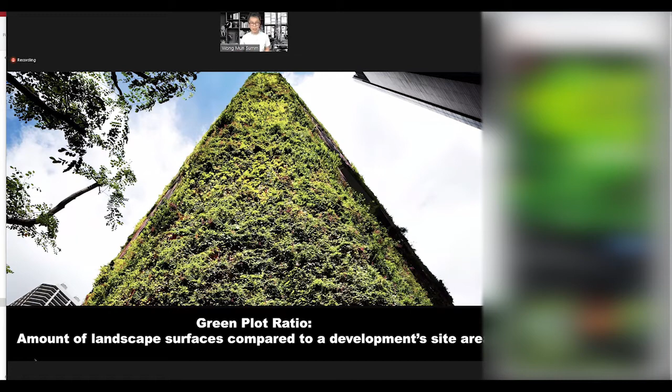So just to explain a few of these indexes, the green plot ratio is fairly simple. It's about the amount of landscape surfaces compared to the development site area. Community plot ratio is the community spaces that we allocate within development over the site area.

Civic generosity is a more difficult one. It's about how the development encourages and facilitates public life in the city.

Ecosystem contribution index is the degree to which a development supplements the city's ecosystem. And the last one, self-sufficiency index, is whether a development can provide its own energy, food, and water.

This one is very important in today's climate, where we're going through a pandemic, where our supply chains are limited and affected, and we can't travel. The topic of whether cities or countries should be self-sufficient has got heads turning, and people are discussing it.

Just to recap some of the projects I explained earlier and how they rate with our own ratings. We did these ratings to push ourselves so that the next project must be at least better than the last. We don't like to stay put, but we like to constantly push the agenda and do better.

This was the basis for us to measure ourselves. So for SOTA, as I mentioned earlier, the community plot ratio is high because this was the 'cheese building' — we created a lot of volume, a lot of anti-mass or negative mass, basically a lot of voids. These voids were actually social condensers, learning and teaching spaces for the school, and you can see the percentage is 220%, 2.2 times over the site area.

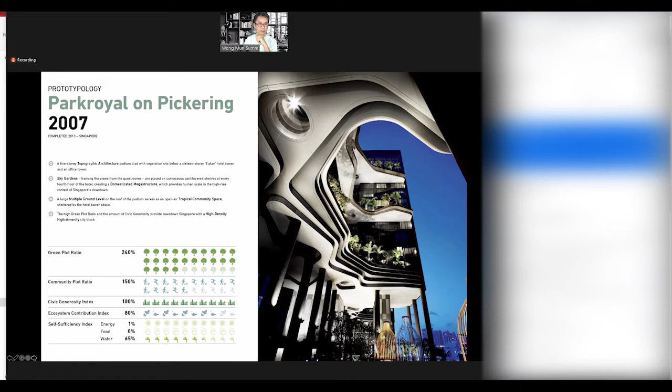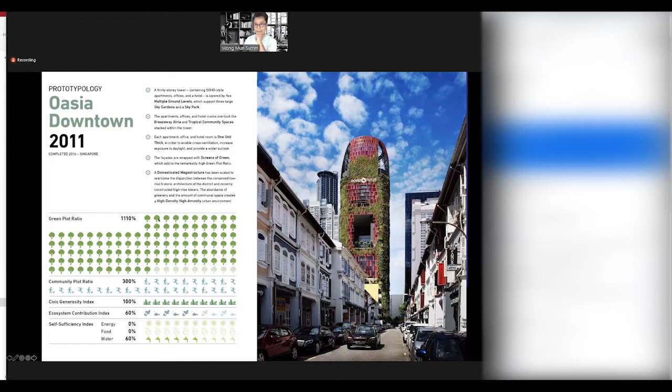And Kampong Admiralty integrates quite a few systems, so the scores are fairly general in nature.

I will now take you through a series of buildings to talk about typology, and how we can scale up some of this typology to precinct scale and then to larger master plans and city scale. I think this is important because city planners crunch a lot of numbers, but they tend to lack the three-dimensional quality of what buildings and architecture can contribute to the bigger picture, to the city scale.

This is where, in one of the chapters of our book called Prototypology, we see every building of ours as a new prototype, and when scaled up, it has a certain impact on the city.

This is the Singapore Pavilion at the World Expo. It was meant to open last year, but due to the pandemic it will open in October this year, in 1.5 months' time. It's almost finished — quite exciting. The greening is already in place, and it does look quite like this rendering we have.

But what was the starting point? It was really about thinking about Dubai and Singapore — we are both man-made ecosystems, but we do learn from nature, a sort of biomimicry, how we actually learn from nature to create our own habitats, perhaps.

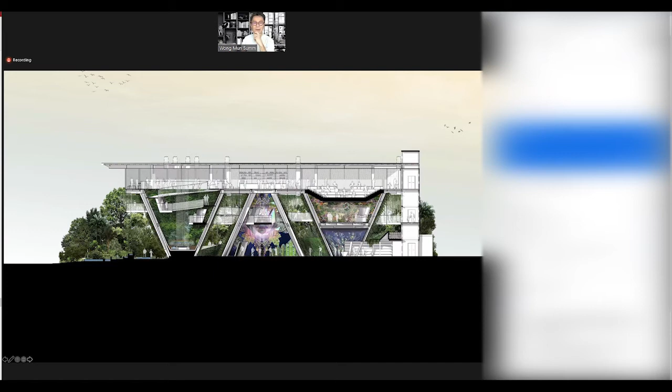So you'll be walking into a 3-dimensional garden. You'll wander around into 3 cones, and these 3 cones are a very innovative way in which we wanted to think about integrated landscaping.

We have inclined and naturally sloping vertical green. We have green on the ground, but we also now have green on the ceiling. We are defying gravity by creating a 3-dimensional, enclosed ecosystem of landscaping.

This is done through having the entire roof area in solar panels, indirectly creating the food and energy for the plants through sunlight, grow lights, and sun pipes.

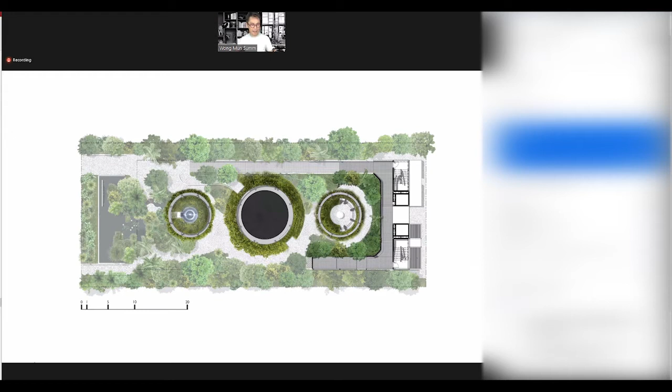So this experience of this small little oasis starts when you meander around the three cones, then takes you onto a canopy walk that brings you around the cones into 3 different exhibits: a rainforest exhibit, a city cone where we highlight some of the amazing things we do in Singapore, and a flower cone where we highlight the beauty of Singapore orchids.

So this is the canopy walk. You'll be able to see landscaping engulfing you from the sides, from the bottom, from the top.

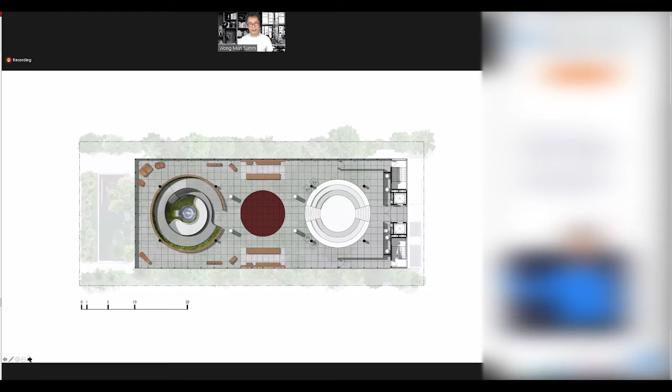Then through all this meandering through the 3 cones and the canopy of landscaping, you arrive at this marketplace, which is almost the entire footprint of the buildable area as usable space. So here you wind up.

But what is actually impactful about this pavilion - because of the full coverage of the footprint of the building as PV panels - we are able to create a zero energy, zero water, and zero waste pavilion. Water is desalinated using the solar panels, energy from the solar panels, and complete recycling of the waste.

Any food waste is going to be composted. Any other waste will be recycled, including the final disassembly of this pavilion.

But what is noteworthy is that we wanted to see the ecosystem services of this pavilion, if scaled up, and the impact it would make in semi-desert and desert areas. So we are comparing against Dubai's natural sandy vegetation, then a typical local bungalow about the same size as this pavilion, the Singapore pavilion, and then scaling up to district level.

So you can see the ecosystem services that the pavilion provides - it helps to purify air. If you see these indexes here, Dubai's natural sandy vegetation is always the basis at 100%.

Next to it is the local bungalow and how it performs, then our Singapore pavilion and how it performs, and finally when it's scaled up into a district like the Palm Jumeirah, full of these local bungalows, what impact it will have.

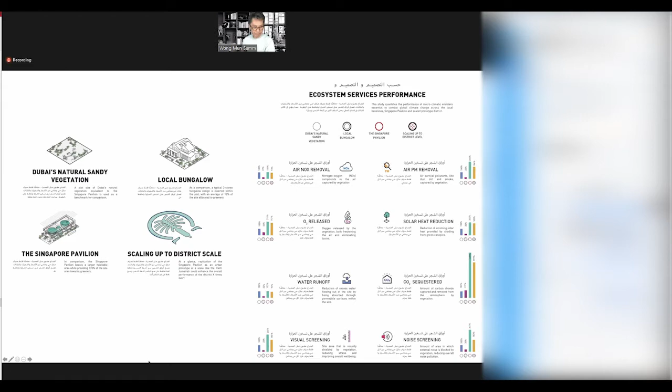So we wanted to also explain, if we actually move this pavilion to a further extent, what it can possibly do. There's a possibility that it will actually reverse desertification. There is science in it that with reintroducing vegetation, it's possible to increase rainfall by 30%. This is a bit of a summary of the good things at the regenerative scale.

That any cities, any countries should consider. I will not run through all of them, but some of the things I think will be meaningful to discuss later is densification by three-dimensional planning. Half Earth is something I'm quite interested in, which we started calling some of our cities and master plans 50-50 cities, in which we think it's important to reserve and allocate 50%

of the land to be rewilded, to be for nature, so that the planet can regenerate. Some other things that could be considered are integrated landscaping, moving towards plant and lab-based food, permaculture landscaping. So these are some of the good practices I think the world can go into.

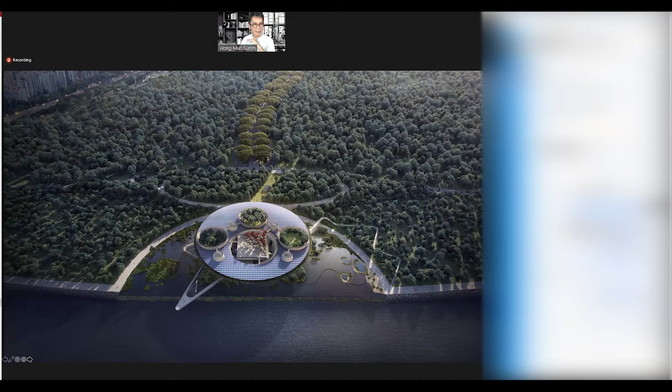The roof is entirely dedicated to solar panels. And if we think about what is the best and most efficient form of clean energy for the tropics and desert areas, it's certainly solar panels. For the tropics, it needs to be on the roof because it's the most effective way. So that actually informs your form, and it informs how you would do three-dimensional planning. The top layer should always be reserved for producing clean energy.

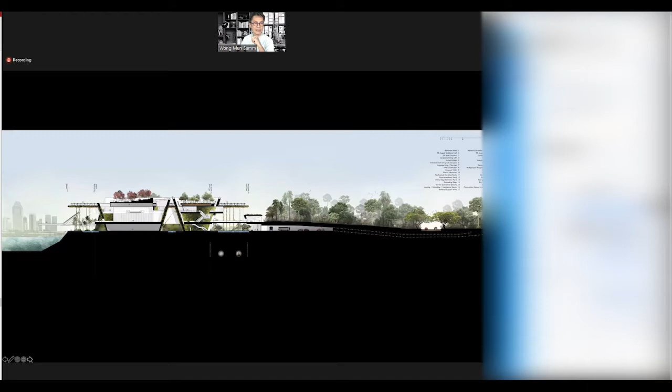So as a section, you can see it's quite similar. There are a lot of gallery spaces and community use spaces within this facility. And of course, the amount of greenery here exceeds the Singapore Pavilion. The amount of ecosystem services it would provide also does very well.

Both on the inside and outside, we also have landscaping, and the landscaping starts to frame views. Even the roof can have event spaces that really take in the beauty of the city. And the whole memorial was a little symbol of Singapore as a little red dot.

This is another scaling up of our typology. I mentioned our cheese building, SOTA. This is the scale-up version, scaled up to almost 2.5 times the floor area. But in terms of capacity for students, SOTA was really a building designed for 1,200 students.

But in this BRAC University in Dhaka, it's actually scaled up to house 12,000 students, over 2.5 times in terms of floor area. So in terms of scale and per square meter for different cities, it varies. Singapore is fairly generous, but in a highly populated city like Dhaka, space standards are not as generous. Still, in terms of the ratios, we've been able to do very well.

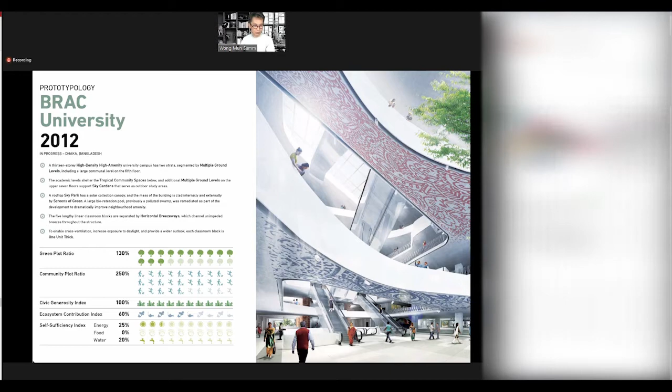This is the breakdown of the systems we were really looking at. We were looking at how we can create effective cross ventilation, creating horizontal breezeways, creating a lot of social spaces, informal learning and garden spaces for the university, creating a large public space on the ground floor dedicated to the community, open for the community to use, and to top it up, a solar canopy to provide the energy needs for the university.

We started off designing for a lesser quantum of students, only 8,000 to 10,000. We were able to achieve zero energy status for the building, but because they kept pushing the capacity of the university, they finally raised it to 12,000, with a target of 15,000 students. With the amount of facilities added, we were not able to achieve zero energy.

So we almost achieved up to about 75% of the energy used through the solar canopy, but it's a combination of passive strategy and innovative mechanical systems being adopted in the building.

Most times of the year, particularly in the winter and in the cooler parts of spring and autumn, you don't need any form of cooling. We can actually use an effective horizontal breezeway to cause effective ventilation to the classrooms. But during the summer period, we came up together with Transsolar with a hybrid system where cool air is pumped in with elevated wind speed in the classroom, using only 40% of the energy compared to air conditioning.

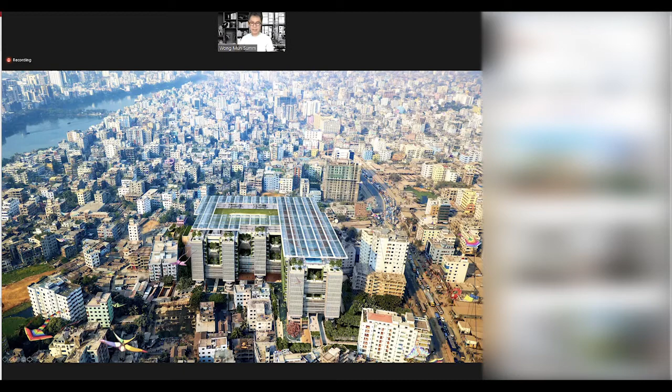What is also fundamental in the approach here is reducing the amount of spaces to be air conditioned. So all the social spaces and circulation spaces are not air conditioned. On the ground floor, other than the multipurpose hall and the auditorium, most of the spaces are not air conditioned. So just to look at the plan, this is a site plan.

The entire roof is dedicated to recreation. You have a running track, a swimming pool, and even a cricket field. But what is actually important about this design is our three-dimensional planning, the layering of different uses, and the club sandwich approach that we've taken.

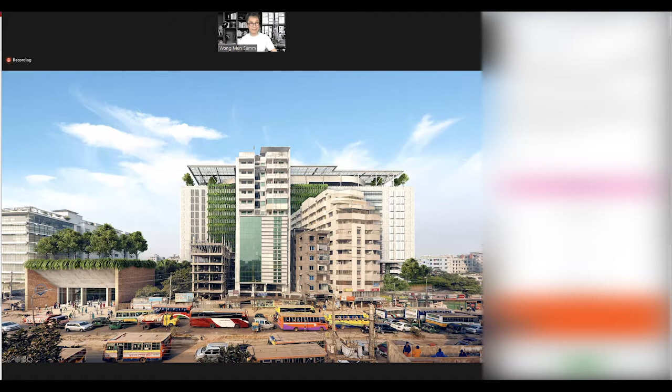This is what Dhaka is like. It's pretty chaotic, bustling, and very vibrant, and we wanted to create an oasis in this very vibrant and busy destination, turning the ground floor into a community park for the people.

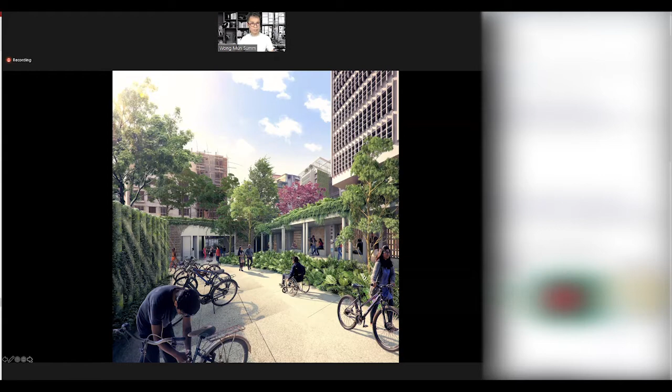And at the same time, as in SOTA, there are escalators and staircases that bring people to the upper levels, which become secure and private academic spaces for the university. These are some of the courtyard entry spaces that bring people into the campus ground. And as you arrive onto the ground level, it's an oasis of calm.

We are using a large water body, and this water body serves the function of cleansing the rainwater, and is also implemented as a grey water system for the development. And you can see from below, the solar canopy covers almost the full extent of the building footprint.

So this is the community park. We talked to the university, and we do want to encourage them to open it up and engage the community, to allow people to be able to use this space.

In terms of a section, you can see on top the long section across one of the breezeways, showing how the escalators bring people to important nodes like the library, the canteen, and the lecture theaters. In between them we also have staircases, bringing people all the way to the top where we have the swimming pool and recreational areas.

Below, you can see the cross section, with the breezeways cut perpendicularly. It is actually a true space between buildings. We created pockets in the roof to bring natural light in, so these long covered breezeways are not actually dark - they are all naturally lit. On the ground floor, you can see it has very little footprint, making it a very porous ground plane to encourage the community to use this park.

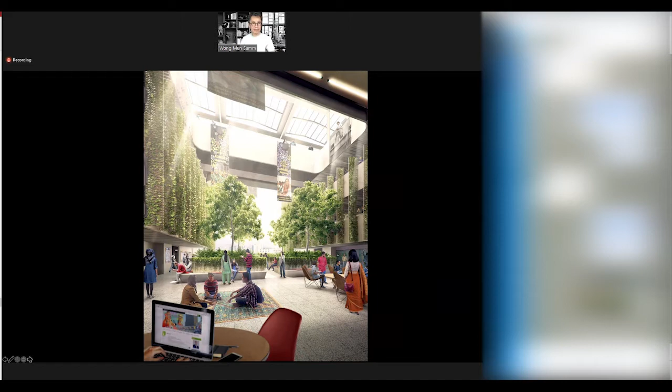These are some of the social spaces in the upper stratum, the private and secured academic areas for the students. The escalators bring people up - because of the number of students here, we needed to depend on escalators rather than lifts. As I mentioned in my first lecture, lifts are very antisocial spaces. Horizontal movement via escalators is something we think will engender a better community spirit within the development and the campus.

And the upper stratum is really a bright and airy, breezy, new kind of environment for an inner city, very dense city, yet at the same time creating the right quality of spaces, high amenity for the university.

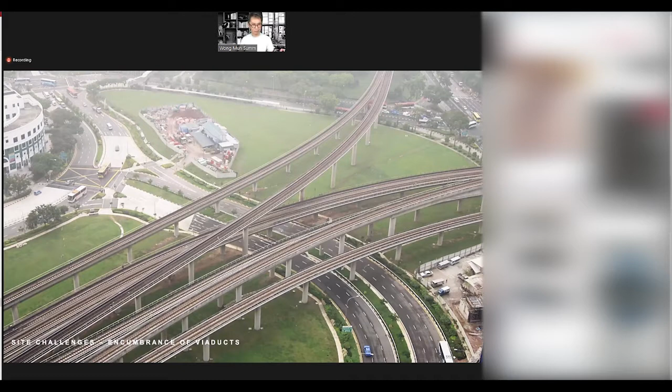So this is the site. You can see all these MRT lines crisscrossing each other, and the land is fairly underutilized because this was only thought of as a single-use space. But in high-density, land-limited Singapore, we need to think of multiple uses for any single piece of land. What it's really being used for is our foreign workers using it for their downtime.

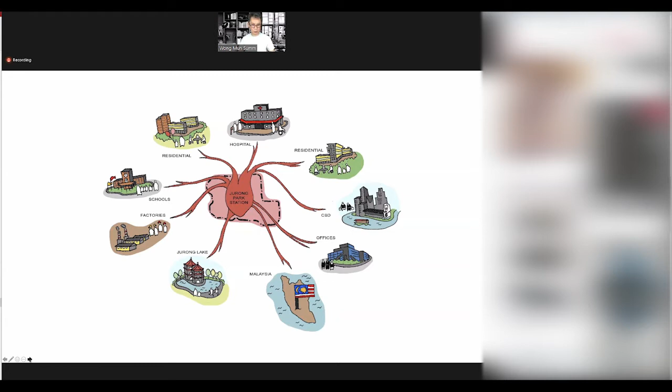That gave us a clue how we should turn this space into a useful park for the community. So this is what we call the Jurong Park Station. Jurong is where it is, station is for transportation, and park is because we wanted to introduce a park into this typology. It has important uses all around it, from hospitals to public social housing to offices, a business park connecting to Malaysia, to the second CBD of Singapore, factories, schools, and also Jurong Lake.

This is the site plan where you can still see all the MRT lines coming out from the train station, going in different directions, but underneath all of this is now a community park. On the bottom right is also the connection through a new form of medium mobility connecting the high-speed rail to this facility.

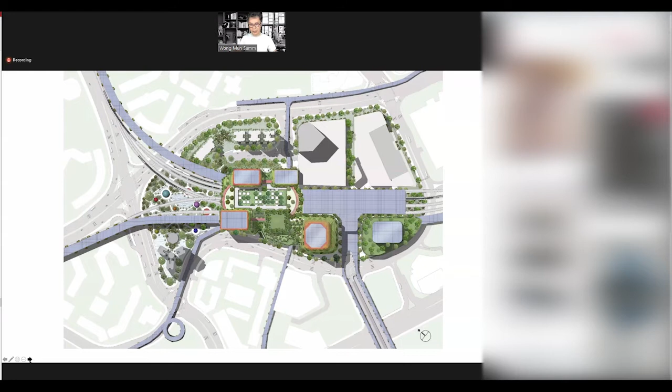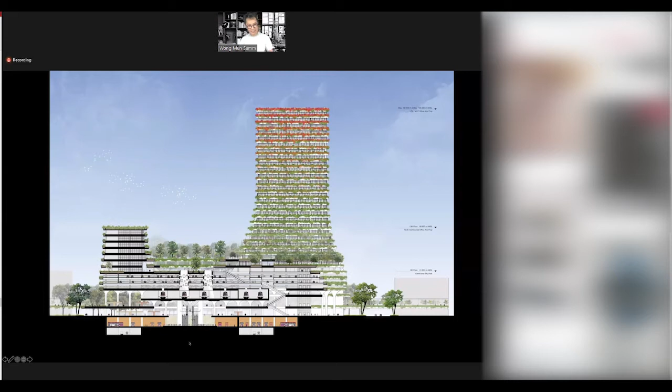This is a short section. You can see how the existing train lines are, and how we build on top of it while still creating enough daylight to illuminate the bus waiting areas, the train concourse, and the bus interchange.

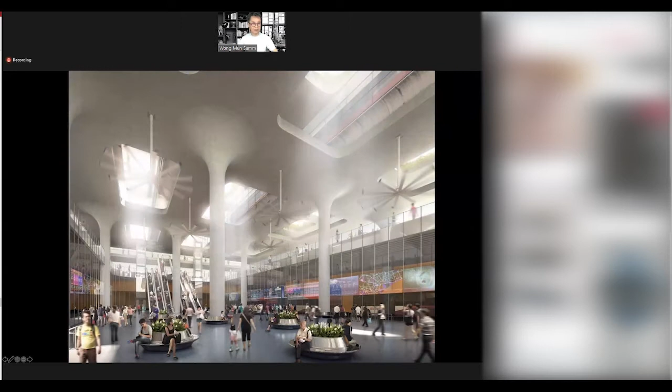This is a rendering of the bus interchange in the basement. You can see the railway tracks above, the MRTs running above, and yet still getting natural light to the basement. Directly outside of this is the bus interchange.

So overall you can see the railway tracks running around, but underneath is now turned into a community park for Jurong.

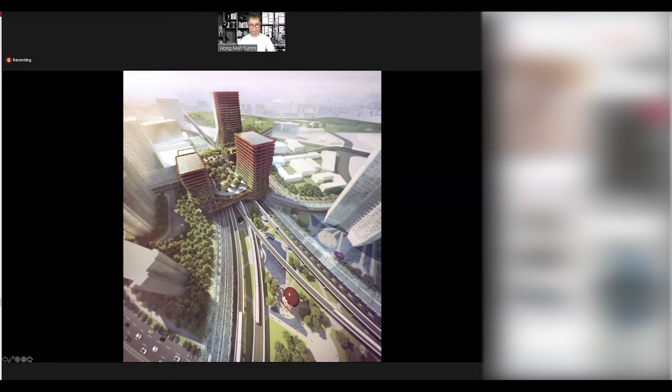What is important for us is how this is really a true transport hub, how this building can send out feelers to connect to all the precincts and to all the various major population nodes adjacent to this development, and also connecting Malaysia and also connecting to our central business district area.

I'll show you how we did it. We realized that between Singapore's Vision's second CBD area and CBD1, we have what we call the railway corridor. All we need to do is actually connect to it.

At the same time, there's an elevated MRT line that runs all the way from Jurong to the CBD area, and then it actually joins up with the railway corridor and also another green spine within the city itself. So we wanted to make all this connection all the way to the south and also connecting to the Jurong neighborhood as well.

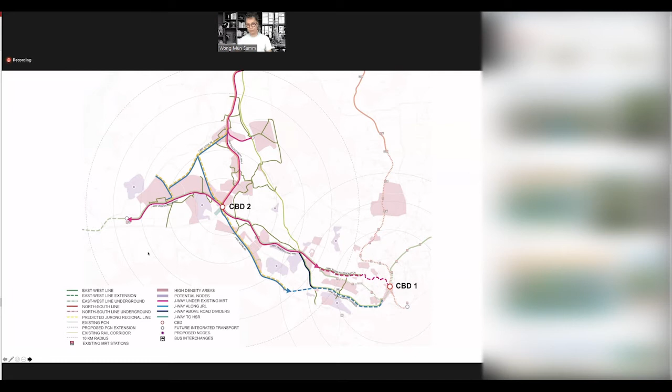So this is what we created: all these pillars that are actually for pedestrians and personal mobility devices, people using scooters, people using bicycles, and yet safe walkways for pedestrians, connecting people to the various neighborhoods.

What is really quite nice about Jurong at the moment is what they call the J-Walk, where it actually connects all the buildings together. This is connecting to that network and creating a bigger network for pedestrians.

But now we decided that we actually would bring in medium mobility, where bicycles and scooters can be accommodated, and designed viaducts for this mobility.

I think we catered too much for fast mobility and for cars, but we haven't done enough for pedestrians and for PMDs. I think this was one exercise where we thought maybe it's possible for us to consider building for it.

As you can see, the roof structure over this mobility devices and feelers are always covered with PV panels, increasing the surface area where we can actually have solar panels to create more clean energy for the development of the city.

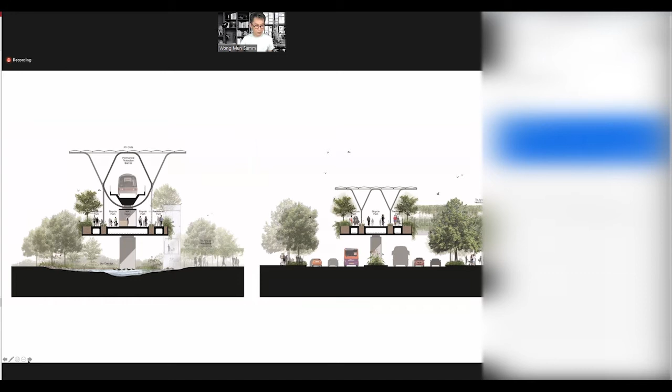There's also how it actually works together with the ground level, where the ground level is also turned into a park. And then with the new J-Way, and also with the fast train coming in, all this will start to connect the entire district and the entire second CBD of Singapore.

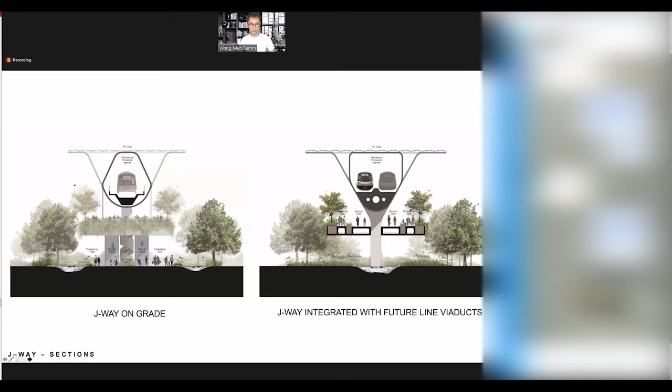So in terms of the plan, this was what we wanted to do. We wanted to create nodes that were sort of mobility kiosks, where you can have shared bicycles, you could have a bicycle repair kiosk. It will also be a little stop for cyclists.

It could also have storage facilities, delivery facilities, all incorporated into it. And yet at the same time, it is actually a mobility device that is separating vehicles from slow to medium mobility. One thing we were quite adamant about was being able to provide universal access.

So it's actually provided for by using lifts to bring people onto this mobility device. You can see how the undercroft space of the MRT now is turned into a very park-like quality, where it also does a lot of ecosystem services for the city.

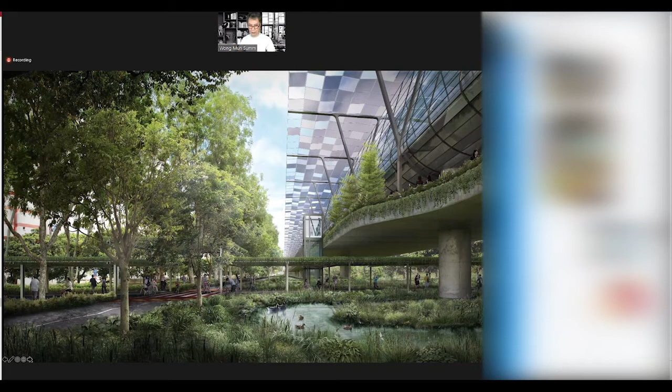So this was the connection to the high-speed rail. It was a little short monorail system, and yet at the same time plugging onto the bigger network of the pedestrian and cycling network.

And then when it comes to the existing neighborhood, a series of covered walkways, and reimagining how the landscape can turn into a more park-like ambience, and start to reduce the amount of car parking and roads we have in our existing urban fabric.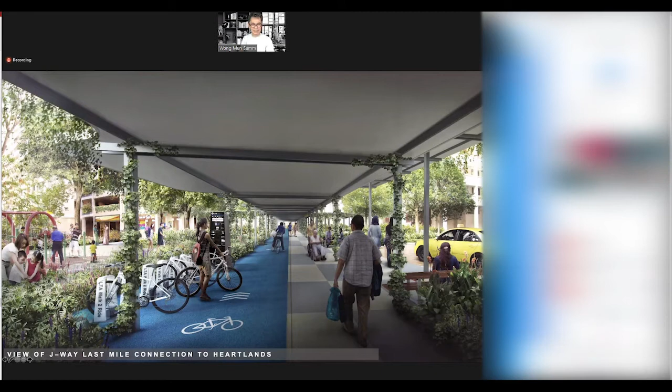Some of these ideas are actually implemented in Tampines, as part of an exercise we did with NUS and with Minister Heng Swee Keat. Some of these little things are implemented, but not on a big scale.

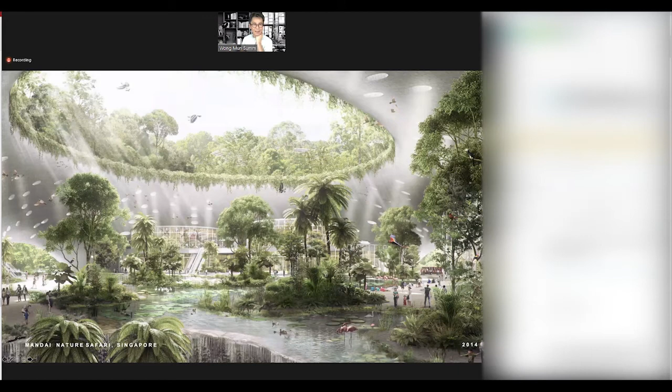Okay, another different kind of transport hub. Here you see is actually for Singapore's Mandai Resort, currently under construction. This was a proposal that we did, but we were not selected.

Again, as most of our projects are always overly ambitious, I think most clients and developers tend to get frightened. But nevertheless, it does inform us how we can push the design agendas. When we do win, we implement as much as possible, but we like to reach for the stars and do as much as we can, so when you start to cut it back, it still achieves a very high quality of our vision.

Here, it was about bringing a new form of mobility, fast mobility, MRTs, right into the doorstep of the Singapore Mandai Resort. Below is the MRT, the car parking, and the buses. But on the ground level, again, is a tranquil calm - it's a park, but it's actually your arrival.

It has many of the Mandai Resort amenities - the reception, some administration, some front of house for the hotels, and some front of house for the various parks within the Mandai Resort. But what is important is that above it is a shelter, and it is actually a land bridge that allows animals to move freely away from people.

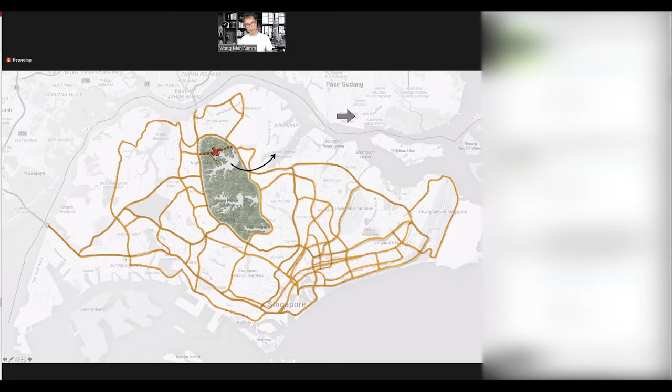Because one of the biggest problems about Mandai Road is roadkill, since there are fast-moving cars through it. So we suggested removing this road, downgrading it, and turning it into only a two-way gravel road, and allowing the canopy of trees to be planted close to one another, so that the canopy can start to bridge each other, so monkeys could swing from one tree to the other again.

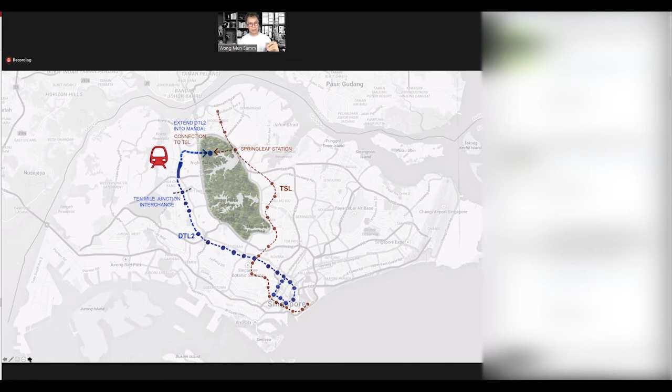And then having the MRT station coming in underground, under the Mandai Road, and then ending up in the entrance facility.

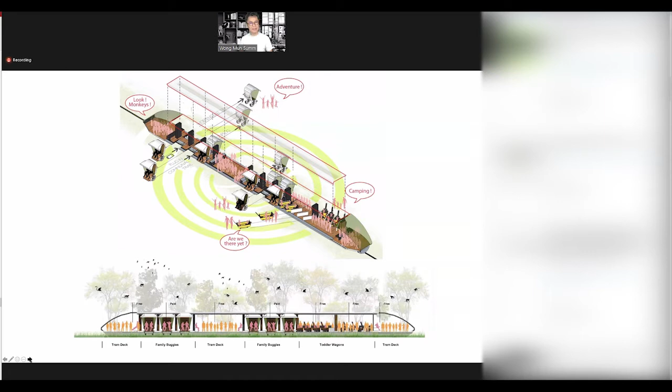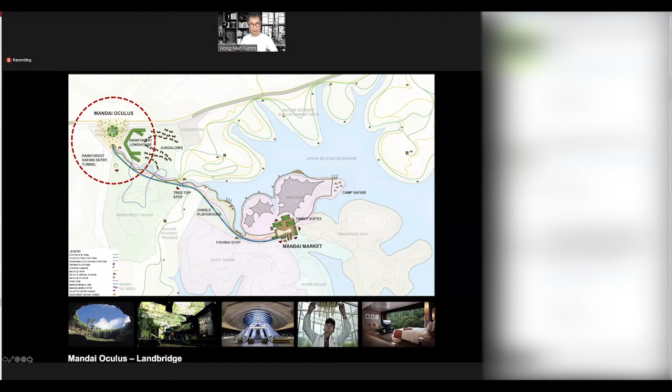So connecting the various parks within the Mandai Resort, we proposed the Mandai Mobile - a very friendly, family-friendly mobility device, good for wheelchairs, good for the elderly, good for groups. It would move within the area in a rather slow manner, giving priority to people and also animals. This is a larger extent of the Mandai Resort, with the various facilities.

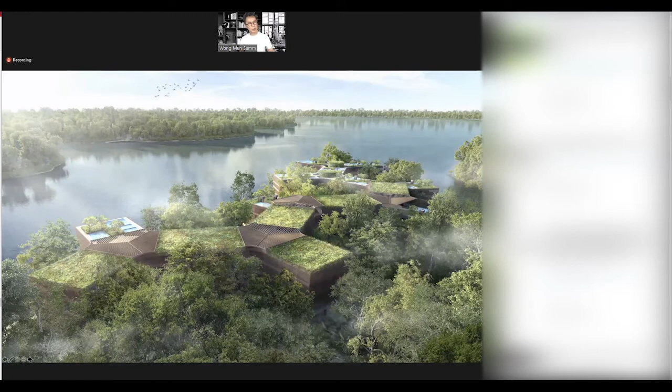And then we also did a scheme for the resort, for the hotel, a resort hotel within the development, and we call it the Hide because we wanted people to hide from the animals, to be able to be living in the environment, but not being able to intrude into the realm of the nature. This park is basically nature first, people second. So people are going to hide away from the animals and the insects.

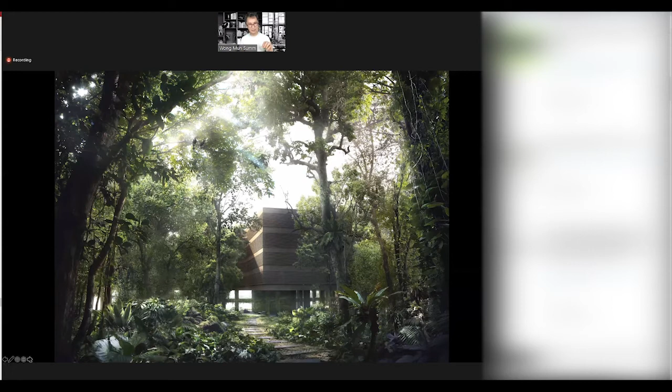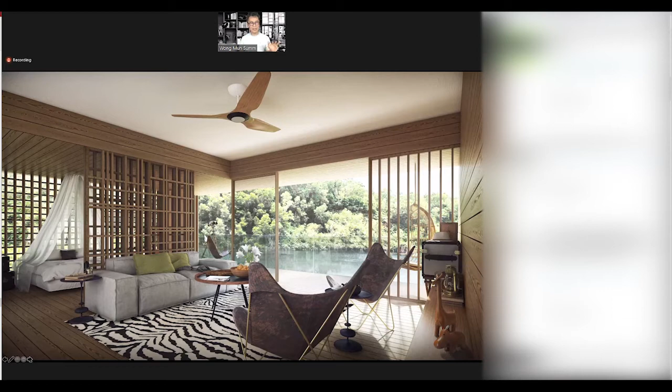Basically all the movement will be underground, and they only emerge into the building directly from an underground connection. Even the ground level is actually renatured as much as possible. It sits on pilotis, and even the facade of the building is such that it's preventing animals from seeing what's inside. You can actually from inside see out, but not disturb the environment. So this is from inside looking out - it has got screens, so hopefully animals will not be disturbed by this.

Okay, there's one chapter in a book called Self-Sufficient City. And I think this is quite important, primarily because currently in our pandemic, due to the supply chains being affected, the topic of self-sufficiency is very important. We always try to think how Singapore is a land-limited country and city, which could be land-limited. One of the most difficult things is how do we create self-sufficiency in terms of clean energy. Due to the lack of land, this is one of the hardest things to do.

To be self-sufficient in water, I think Singapore is going to achieve it very, very soon. In terms of self-sufficiency in food, it's not difficult - Singapore's target is to achieve self-sufficiency in food by 2030. But if we scale out industrial food production, we can easily meet the target of self-sufficiency at any time if we are committed to spend the money on it, to create factories for food. But what is important is that we need to start thinking how to create enough horizontal surfaces to turn into PV canopies so that we can actually harvest as much clean energy as possible.

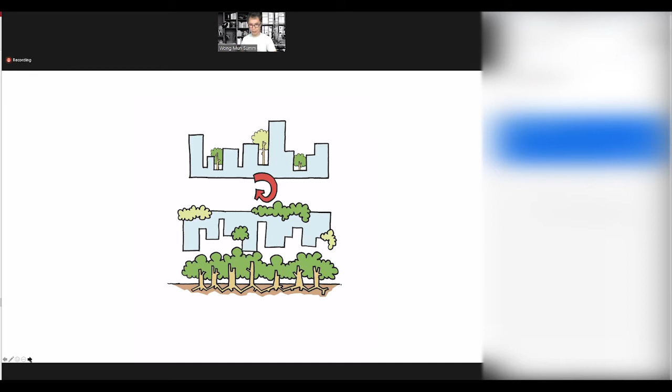So one of the ideas that we had in layering cities in the first chapter of our book, Garden City, Mega City, is inverting the skyline. Instead of the usual bar chart city skyline like in New York, we reversed it - have a flat top, but have an undulating ground datum that allows the landscape and nature to permeate it. So this was completely rethinking how the city typology can be effected. You can see as an aerial image, the top is all about enlarging the canopy for solar harvesting.

So this was a new town development for 250,000 people. Because this is residential, residential energy usage is less than other uses. Say if you are 5 to 6 stories with reduced energy loads, efficient buildings, less reliance on air conditioning, the footprint of your building should be able to sufficiently give you enough footprint for creating zero energy. But if you're 10 to 12 stories, you almost need to double this footprint. So in this case, this master plan was restricted by the airports around it, we had height control, and it allowed us to go to about 10 to 12 stories, which is perfect. We actually created twice the footprint size as the solar canopy for this entire district, making it zero energy.

So you can see these are based on the courtyard breezeways, where the buildings are lifted up as the inverted skyline, the landscape is allowed to permeate the buildings, and at the same time allowing nature to also permeate it. You can see we have enlarged the canopy for the buildings, for the solar canopy, by cantilevering out from the footprint of the building by twice the footprint, so that we can actually create a zero energy new town.

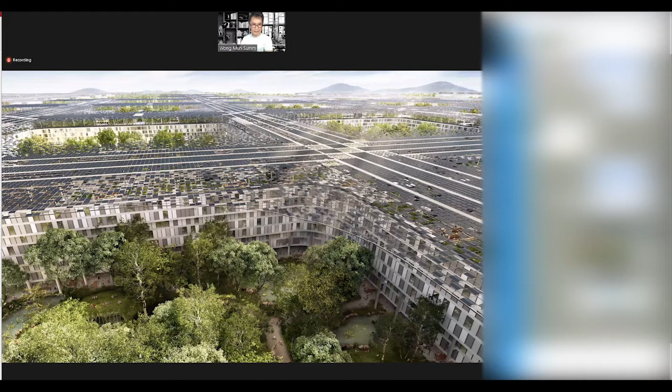So as you can see, how it actually seen from the top, and then the farmland layer. And the ground layer, the community park layer, is for our pedestrians, and also for a new form of district mobility.

This is the last project that I'll show you. This is scaled up even bigger. This is happening in Singapore, under construction at the moment. It's called Punggol Digital District, that includes Singapore Institute of Technology. We did the master plan of this whole area.

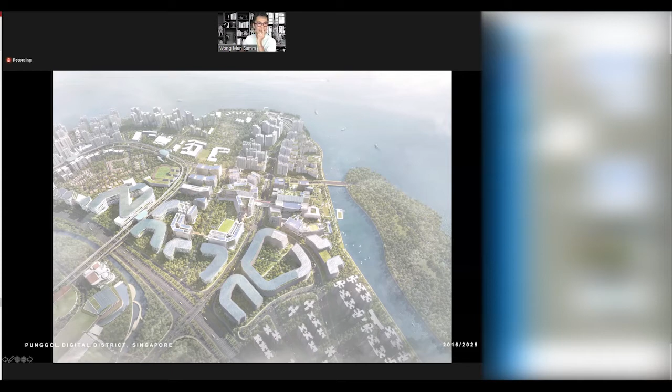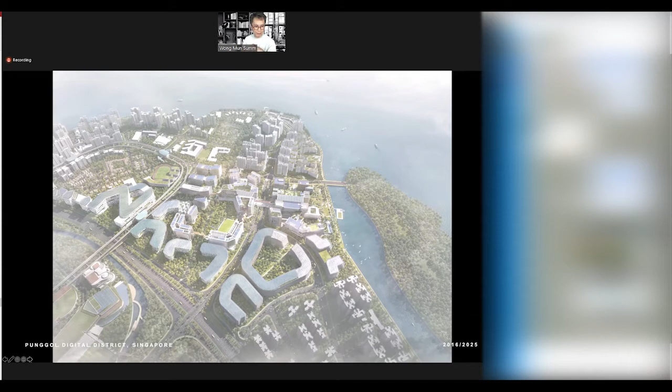There's almost 54 hectares. And while we were not successful in the new town master plan, the Zero New Town master plan, we were commissioned to do this master plan for Punggol. So a lot of the ideas that we thought about in the earlier master plan are being implemented here. I'll show you more about the implementation and talk through some of these implementation strategies that we have.

So this is where Punggol Digital District is located in the northeast part of Singapore. And there is a current population in Punggol that almost amounts to 350,000 people. But there is actually very little work in this area.

So putting this business park at the university here provides a lot of work for the residents in this district, and making their commute shorter, turning it into a 15-minute district. So this was a very good plan, to implement this business district in this area, and to also put a university in this area.

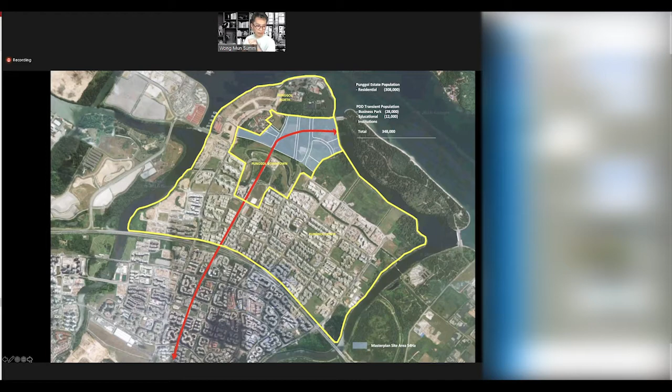So what you see here in red is a new MRT line. The MRT will arrive into the center of our development. So there are two important spines here. One is the extension of the MRT line, the northeast line terminating in the NEL extension under the first phase of JTC Business Park.

So this is the aerial view of the master plan and the business park incorporating the university, surrounding it in the north, in the south, in the west, and the east is all HDB housing estate. In the middle will be the university and the business park. There's a small pocket of residential, sort of landed residential next to it. It's basically made up of industry and also made up of education and a few reserve sites.

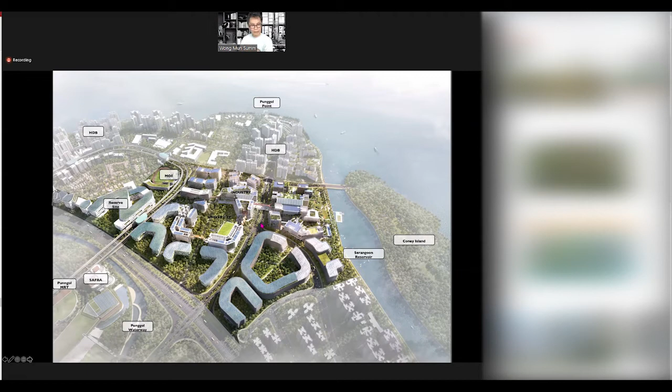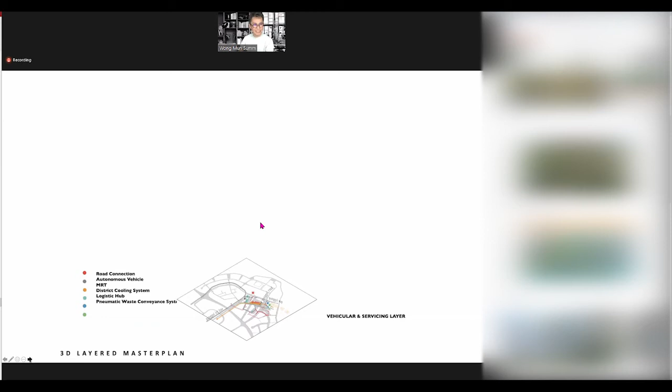So again, like the three-dimensional planning that we had, the lowest level, the ground level, or rather the subterranean level, is actually the vehicle and servicing layer. I'll explain more a little later about it.

And then the next layer is a very pedestrian and community-friendly environment. It's the community park layer. We have almost taken out all the roads from 20 hectares and turned it into a pedestrian park-like environment for the users and also for the community at large.

And then we have above that, the academic and the office layers. And of course, on the very top, the tropical umbrella, having the solar canopy and also commercial food farms.

This is the section across the university and the business park. Here, this is on the left is the landmark building for the university. It housed the university library and the student forum, and also some sort of lab facilities and classrooms. And on the right is the JTC Business Park.

It's very connected by the ground level, by the underground connection, and also elevated connection, which we call the collaboration loop.

Here you can see the ground level is actually very pedestrian friendly. It's the MRT, which you can see at the lowest level, sort of under one of the business park buildings, and it arrives in this big public space that we call the Nexus, which is a very large tropical community space, bigger than the one in Kampung Admiralty, bigger than the other ones that we've done. It is able to house something like 3,000 to 5,000 people.

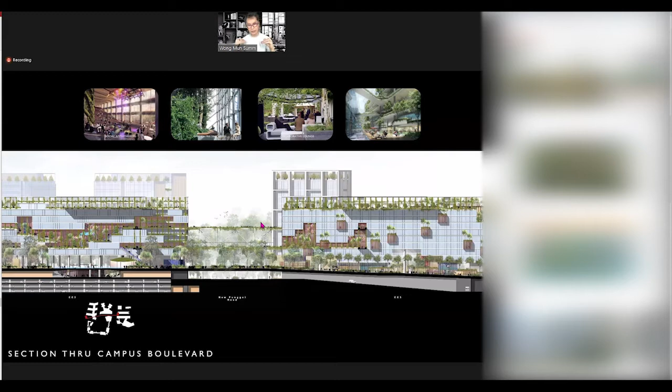And in the long section, you will see the basement is doing the heavy lifting for this master plan and for this new development, this whole area, because it will incorporate the MRT coming in, the future mobility, logistics, and the district services. And yet above ground is a park-like environment and aerial connection connecting buildings and verandas that will look into a community park.

This is the section cutting across the campus boulevard, which connects, is actually the path of the MRT connecting to the development, and it's turned into a pedestrian-friendly pedestrian mall. And it brings people to the waterfront. At the end is Coney Island.

So I'll just explain how we created a park, a sort of a people-centric park-like district. So in terms of a strategy, instead of your traditional city block, where you have all this network of roads, we went for a super block where we only utilize the existing plan network, and the internal roads are turned into pedestrian walkways. The connections that we need between buildings and entrances, drop-offs, are actually brought into the underground and connected between buildings, thereby freeing up the entire area as a pedestrian-friendly environment.

So you can see the top is the diagrammatic explanation of it. The bottom, as superimposed, was the original plan, the road plan of the development, and they all turn into green pedestrian-friendly pathways.

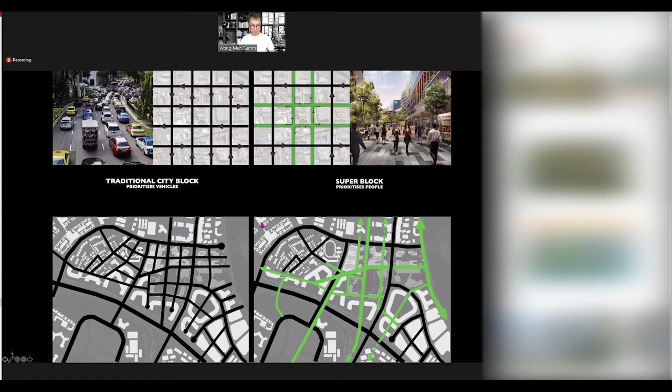So by incorporating the MRT right smack into the master plan, it brings people from all over Singapore into this pedestrian-friendly environment, exiting the MRT directly into Nexus, into a park-like sort of ground plane. Also connected to it is the bus interchange, the extensive connection between all the buildings that's for use for servicing and also for car parking.

So the good thing about connecting the car park together is that we are able to reduce the number of car parks, and also being able to connect to different buildings so that you can exit to the main roads by different exit points.

So this is the undulating site. We can see one area, so the north area is the ground level where we have the Nexus and the bus interchange. And then the connection across to SIT, which is down south, is connecting all the buildings of SIT together. So basically, you don't see any roads on the ground level. They're all embedded in the subterranean.

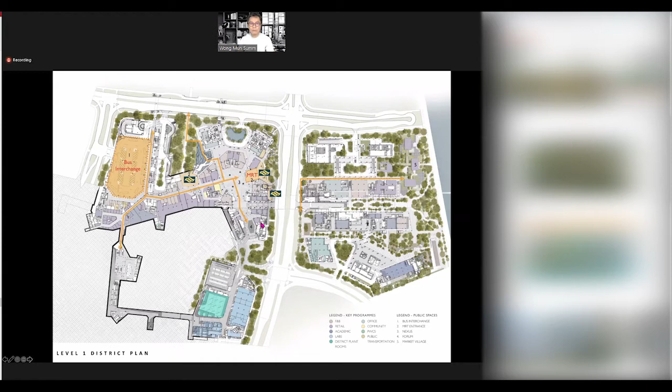So as I mentioned before, the basement is doing a lot of heavy lifting. We envision this as an underground subterranean structure, primarily because in future, a lot of the vehicles will be autonomous. You don't need people to drive them. You can actually drop off and then they find their way to park their cars or they move out.

The same goes for buses as well. So in fact, we think that a lot of the energy usage can be reduced further in future when all these autonomous vehicles start plying the basement.

We of course have the MRT coming directly into the development, but the main sort of services accommodated in the basement are the district services. We have district cooling, we have a pneumatic waste conveyance system, we have a smart grid, all the connections are made underground.

We have a centralized logistic hub where from all the ports, they'll bring to this area and then be transferred into drones to be delivered to all the addresses in the development. It will be an autonomous vehicle hub.

So some of the parking spaces for autonomous vehicles will be parking here. And also it connects to the MRT, the transportation nodes.

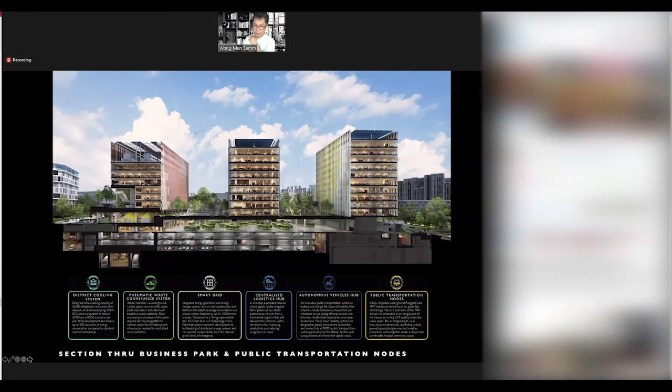There are also other facilities like substations and M&E services and facilities that are actually embedded in the basement. So sort of freeing up the ground level, you don't have any more substations, they're all underground.

So this is one of the renderings showing the MRT entrances connecting to the Nexus, very direct connection, but also multiple uses again. All the staircases turning into event spaces and social spaces.

This is a community-centric district, and I'll tell you why. We studied the whole network of Singapore again. What is the pedestrian-friendly and bicycle-friendly network? We have the rail corridor, we have the Round Island route, and we have the Kallang corridor, and we have extensive sort of PCN, all connecting around the four corners of Singapore.

And we actually thought we can have a new one. We call it the Punggol Line. This Punggol Line is going to be sort of a pedestrian and bicycle-friendly line that will connect PDD to the Kallang corridor.

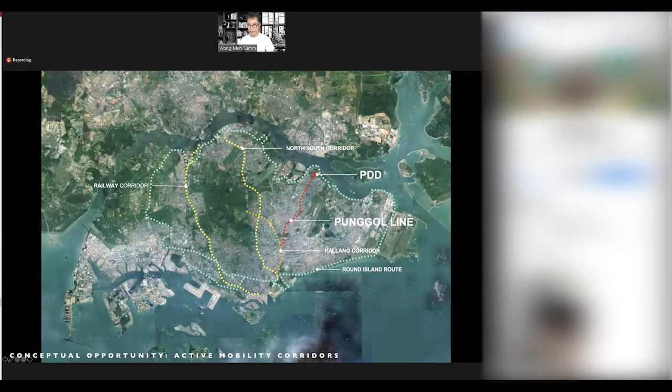And why it's important is because it caters to a very large community. As I mentioned, Punggol itself has already got a residential population of 350,000 people. Sengkang has another 300,000, and then Hougang and down south.

So we almost connect 1 to 2 million people within Singapore. And if we can create a cycling path, you could actually provide an alternative mobility system and network for Singapore and relieve people from using cars, and also supplement the mass rapid transport system.

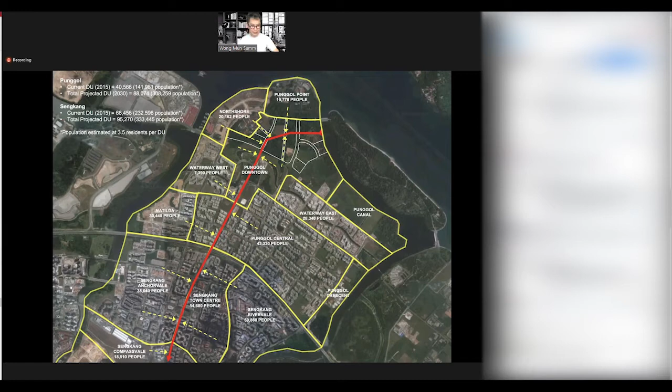So you can see this is a calculation of the population that we were able to service using this Punggol line. And this is currently what is happening under the MRT tracks, which we wanted to convince the government to turn into a bicycle-friendly path that will connect people all the way to the Kallang corridor, turning into a linear park and connecting the community.

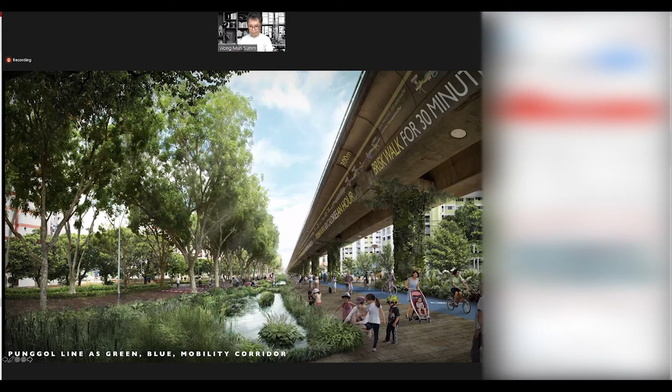And when we needed to go overhead, it becomes land bridges and also a sort of commercial, linear overhead bridges where you can actually have people plying it. You have bicycles, you have pedestrians, but you could also activate it having kiosks and some convenience stores.

So the other aspect of it being a community-centric development is the Punggol Line, bringing people to the campus boulevard and then to the waterfront, and then intersecting with the heritage trail. So these pathways are curated with important nodes that will activate all the spines. We have the community park, the SIT forum, the nexus, the promenade plaza, and the boulevard plaza.

So you can see these were the two paths in the master plan. This is actually phase 1, currently under construction. We are also building all the buildings except for plot 2 of SIT, but the rest is actually executed by us. You can see there are major nodes, social enablers, to activate this spine.

You have the Boulevard Plaza, which is the entrance to the lower ground. We have located the hawker center, an important affordable food facility and amenity for the residents and community here. The bus interchange connects to a community center and directly to the MRT and the Nexus, and also to the forum of SIT. And then towards the waterfront, you have retail, F&B, a market village, and the promenade plaza.

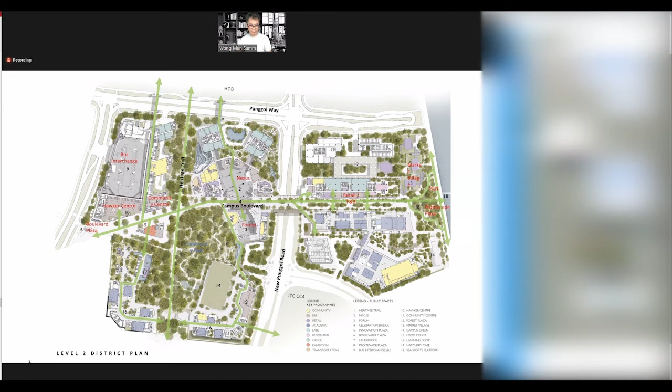So we curated all kinds of activities, from outdoor sitting areas to collaboration and collision spaces, as we call it. We have encounters with art using the land bridge as an art platform. We have areas where we could bring in food trucks, temporary storage, temporary stalls and food kiosks, and even passive recreational areas, exhibition showcase areas, and brainstorming areas for both the university and the industry.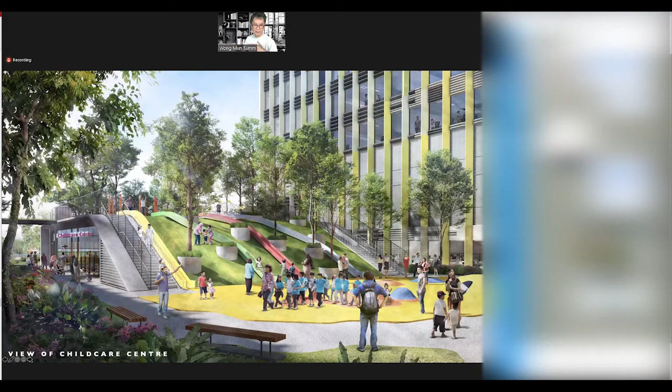So these are some of the renderings and images of the campus boulevard, starting with the Boulevard Plaza. It's a pedestrian-friendly mall, also the vibrant spine. Adjacent to this will be a childcare center and playgrounds, and the hawker center that I mentioned.

And then covered plaza spaces next to the community center, the PA Association Community Center, where events can take place. Above that is a bit of a convention facility for the business park.

And seeing this collaboration loop, connecting all the buildings in phase 1 together. And actually you can see an enlarged solar canopy covering the connection between SIT and the business park, connecting 2 large nodes, the forum and the nexus, which would have congregation of almost a few thousand people at any one time. So this is the nexus.

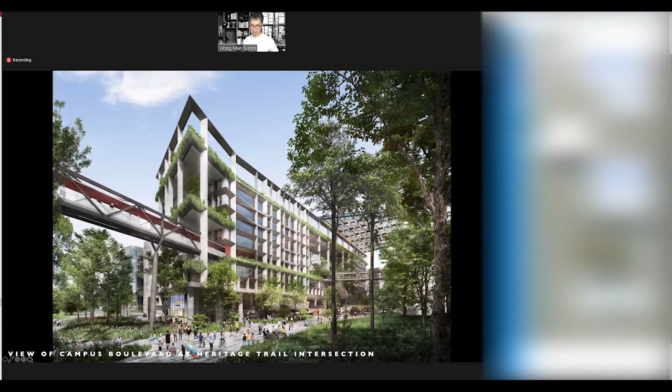It's a multi-purpose, multi-use tropical community space. It is not air-conditioned, it's naturally ventilated. All the simulations were done. We'll show you later how this is a very porous space that allows breezes and cross-ventilation, and when there's no breeze, we have these giant low speed, high volume ceiling fans to move air around. This is basically a multi-purpose space, on top of the MRT, hoping that this could be an outdoor exhibition space, performance space, and also a commercial space.

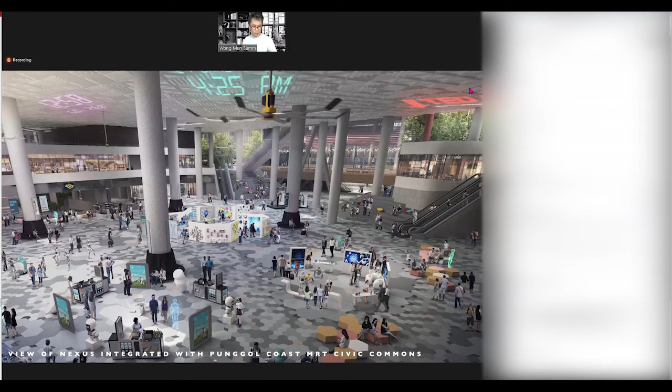And then adjacent to that, connecting to that - actually, before I go back to the other one, you can see on the top right it's connecting across to SIT. The next space I'll show you is the SIT forum. So SIT will be connected directly through all these public spaces into the SIT forum, which is an amphitheater, and it looks up to the SIT library.

This is the other end of the campus boulevard, the retail and F&B section of it that brings people to the waterfront.

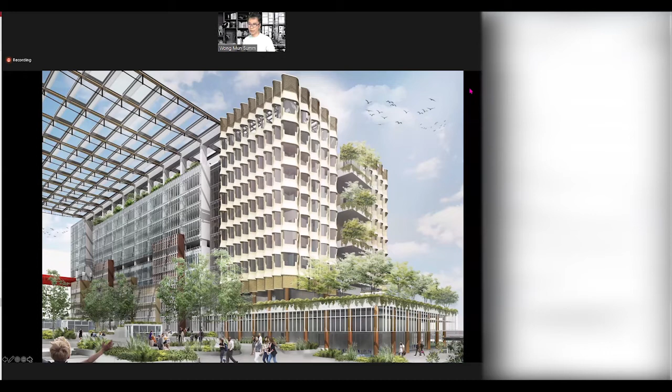And here we actually have a co-living space where we bring temporary residents into the area. And on the waterfront, there's a park-like setting, a market village, sort of having retail F&B next to the waterfront, to activate the waterfront as well.

It's important to think of design not just from providing physical aspects of it, but curate and think about the real estate and the commercial aspect of it. Because without doing that, it is hard to think how to activate public spaces.

So this is the Promenade Plaza, the waterfront, creating multi-purpose spaces for different uses, for performances, for boating, for bicycling, and also for F&B.

The next important thing about this development is that it's nature-centric. Because of the heritage trail, and because a large part of it was fairly forested, we decided that we must try and save as much nature as possible. At the same time, Punggol is a very dense place, high density and a high built-up environment with very little parks.

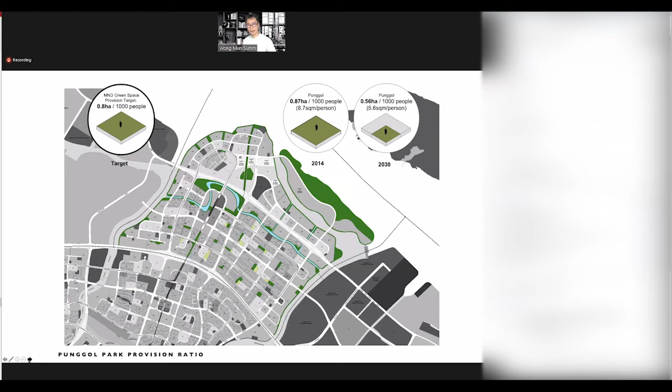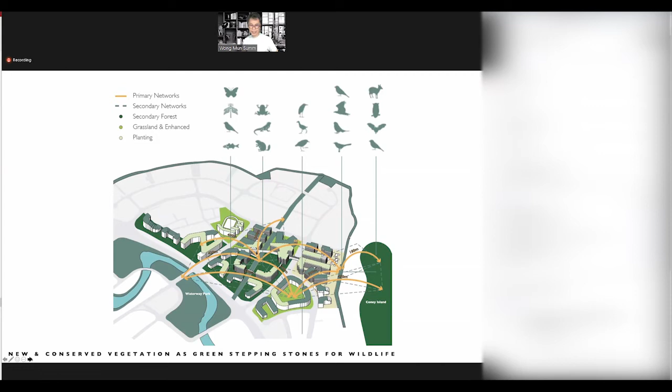And this is what we get as part of it. We have a community park, conservation of large trees, building sensitively, trying not to tear down as many trees as possible. We're keeping almost all the major old trees here, including creating canopy classrooms to bridge from building to building, giving students and the industry a different perspective of nature.

And here is the repurposed Punggol Road turned into a heritage trail. It actually cuts through the middle of the master plan, but is turned into a pedestrian-friendly, park-like environment. So in fact, when you walk this trail, you'll only see basically the forest and glimpses of the buildings.

But at the same time, this is a business park. It was envisioned as a vibrant industry and educational facility. We needed to facilitate another system, and this is about creating vibrancy and industry collaboration. We wanted to enable that through making connections between important buildings and hubs, important nodes.

So here you can see these are the first phase developments. All the buildings are connected on the 5th level, connecting through the canopy walk. The classrooms are embedded in this canopy walk. It connects to the innovation bridge.

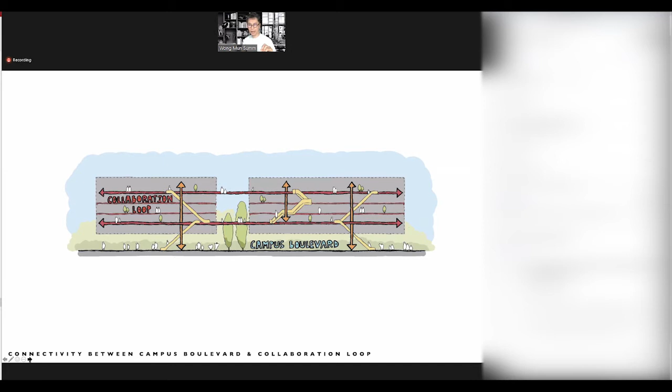So the idea was to think of an intermediate level to make this collaboration, using staircases and escalators to connect the various stories of the buildings, and also to discourage the use of lifts. We have actually very little lifts. We try to have more escalators and staircases, only minimizing the lifts to accommodate fire lifts and servicing.

So you can see here is the red loop, the collaboration loop, and how it actually plugs into most of the buildings.

As part of this collaboration loop, you have these interesting nodes, social spaces filled with nature and filled with collaboration ports, nooks, and corners.

And then into larger atrium spaces, this is called the Digital Canyon. This is one of the main business park buildings of JTC, and in the middle of it is a central courtyard with a central focus, actually being activated using F&B cafes and other facilities enablers. It's actually quite important, if you create spaces like that, to also think about how it could be activated.

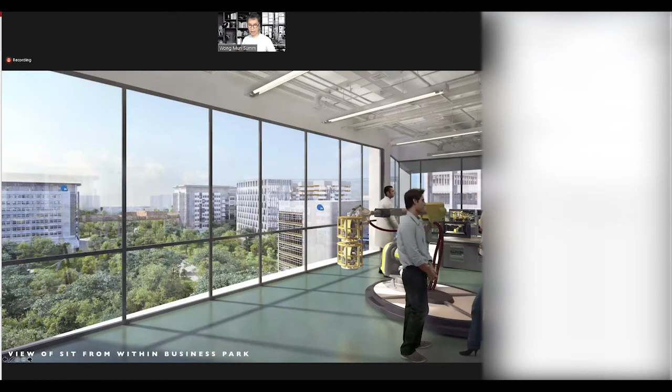So all the classrooms and also the business park look into a sort of community park, a large forested area.

It is also a resilient and productive district, and that's because of the last layer: it's the solar canopy layer and also the commercial farm layer.

And we have one layer of commercial farms. This is actually currently being studied and implemented. And also on top of that, a PV canopy.

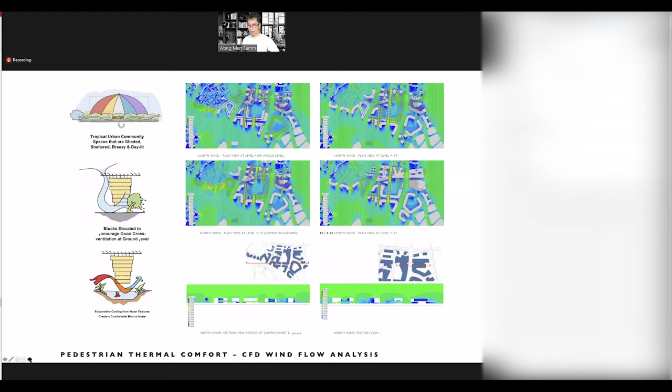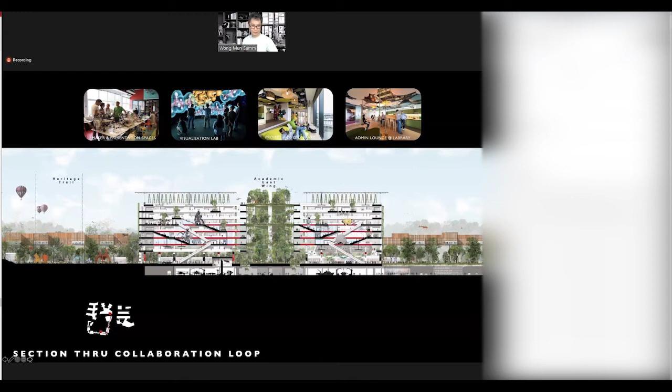Looking at the section across SIT, the collaboration loop, SIT has in fact itself an educational spine that connects itself at the 5th level and the 10th level through amphitheaters, learning spaces, and study pods. And then connecting between buildings will be the canopy walks, which are filled with study spaces and classrooms.

The ground level, you can see, is actually very porous, but we decided that we must have something to activate it. All the lecture theaters are basically on the ground level, and they are disguised as rocks, but contributing a lot of vibrancy to the ground level as well.

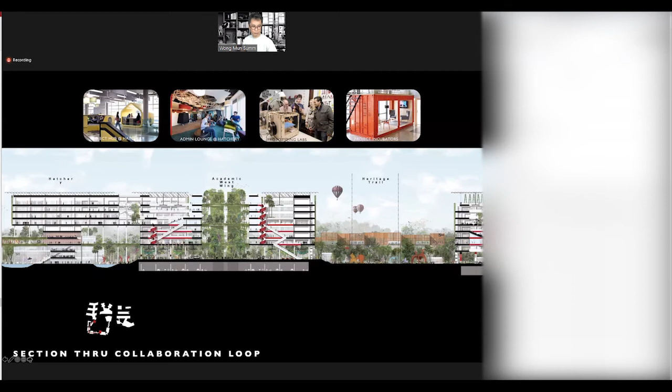SIT would connect to JTC. There's a further scheme too, where SIT and JTC, the business park, exchange spaces, embedding the industry in the educational facilities, and the education side embeds into the business side to have better collaboration between the two major stakeholders. So this again is looking at the top, and then looking at the commercial farm layer as well.

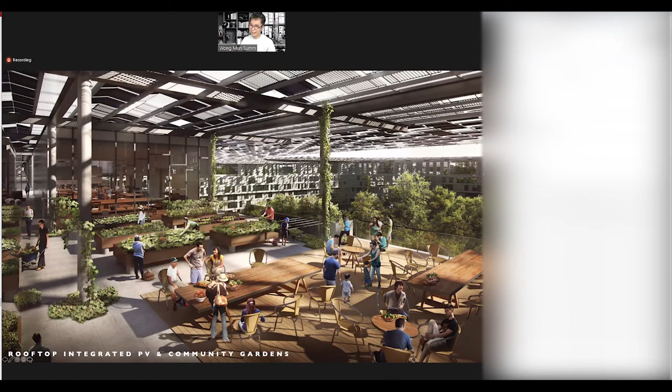That brings me to the end of the PowerPoint presentation.

Wonderful. And I did it on time. Thank you so much, Mun Summ. You very patiently took us through what looks like amazing, changing large swathes of Singapore's land, really.

We'll now take questions from the audience. Students and guests, please put in questions in the chat space. Students, please put your hand up to ask questions. We're all processing it. I wanted to ask a question. I'll start off, Mun Summ, then, if there is a space in there.

You talked about several criteria, including one when you started showing the projects in Dubai about the self-sufficiency index, and the one for food seems to be very difficult to get to. I wonder, in all of these projects, when you work with several developers in a large-scale scheme, where is that conversation happening, and what are the challenges, because I saw in those projects it's very hard to meet those indices. Yes.